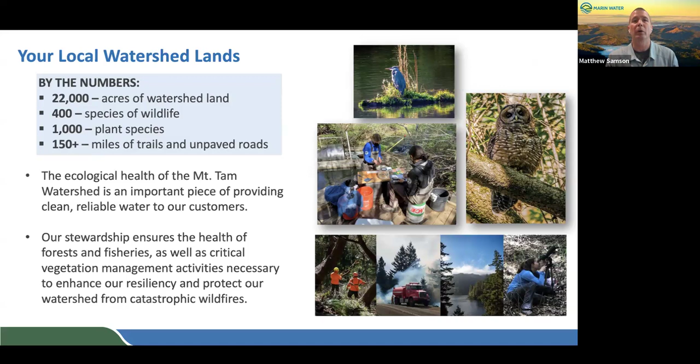It would have been a very environmentally negative impact to a lot of communities, and we really would have been not looked upon kindly in the court of public opinion, as we look to take advantage of what we would consider disenfranchised communities in the East Bay, just to make sure that we could get our water when we wanted it. So you can see the timeline, how it went.

We started a water supply assessment. This was in the year I was fortunate enough to be elected into. It wasn't part of the first component, but the high level evaluation of everything we could do went into this water supply assessment, meaning every option we could think of, whether it was recycled water, desalination, expansion of reservoirs, more water from the Russian River, or a variety of other small projects we could aggregate to try to get us to where we're at. And we had a little breathing room because we had the miracle rain in October of 2021 that filled our reservoirs up.

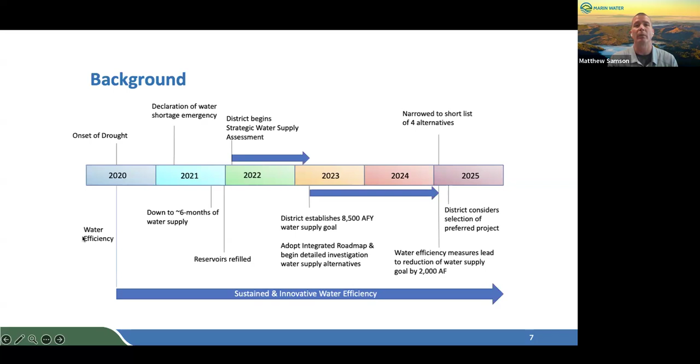So when we looked at our demand, and this is the little bit of the controversial part, what you see there is we had a baseline need of 8,500 acre feet, and that's what I was talking about with the supply assessment, or SWSA, as you see as an acronym.

When we start trending the water use by our customers coming out of this drought, the 2021 drought, we have not experienced a rebound that we've expected. Historically, as droughts happen, people's water use drops off considerably when we call out for conservation or reduction in water use. And then we try to throw a bunch of different measures at it, whether it's a low-flow toilet or removing your grass and replacing it with drought-tolerant plants, a variety of things. And so we don't ever see usually a return to a traditional demand, but we get somewhat close.

Well, this time we haven't gotten that close, and so we've been well below what we've had before. What I mean by that is prior to this drought, we were averaging about 27 million gallons of water a day, production-wise. And we're still down at 20 million, sometimes a little bit less right now, as an average throughout the year. So we don't see this big rebound.

So we've lowered our initial need down to 6,500 acre feet. That still gets us way higher, and I'll show you what that would mean in terms of, had we had this amount of water historically for the past 20 years, what that would have meant for 2021.

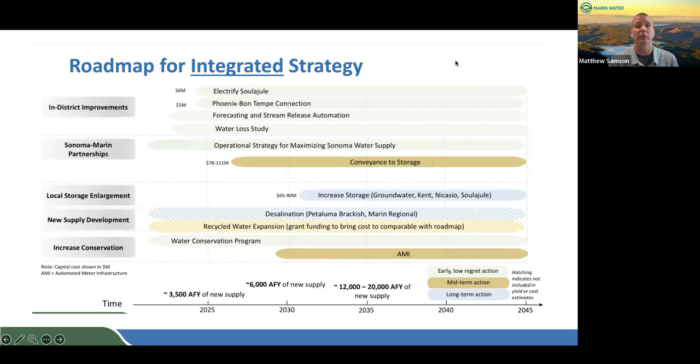So when we looked at the water supply assessment, going back, the assessment came back and said, all right folks, here's all the viable options we can look at. Starting on the left, the roadmap, we looked at 3 different general categories.

How can we potentially get more out of our partnership with Sonoma Water? How can we make our own buckets or reservoirs bigger? And then is there any way we can start making water in a cost-effective way that will provide a bunch of different benefits?

From those 3 categories, you can see we had quite a few alternatives in the conveyance partnership with Sonoma Marin. We looked at 11 different ways to increase our reservoirs, and then we looked at 9 new supply alternatives. Those numbers might seem a little high, but when you break it down, you'll see that something like a desalination plant has 3 alternatives based on water production capacity.

As we continued to whittle it down through evaluation, we got down to smaller numbers. You can see 13 to 3, 11 to 3, but the new supplies stayed the same. And then out of those 3 categories, we had the 4 recommendations you see all the way to the right.

The PETA 3 - PETA 3 is a Petaluma acronym for where the pipeline would come, or an enhanced pipeline at Sonoma. The local storage, we looked at just 2 reservoirs based on feasibility - that was Soulajule and Kent, both to raise - and we'll dive into those just a bit.

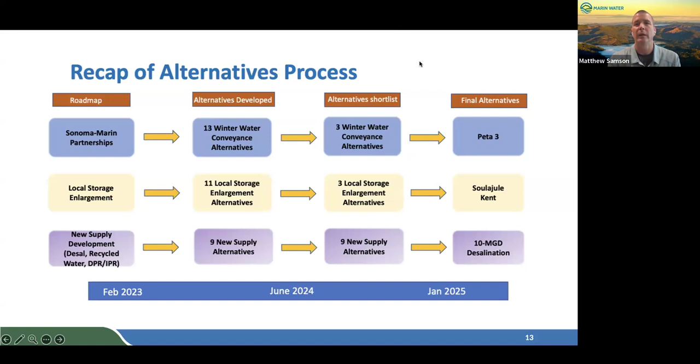And then the most cost-effective supply project landed on the 10 million gallon per day desalination plant. Going back to thinking about what I said, we're at 20 million gallons a day use right now, so that would actually provide half the day's use. But I'll go into some of the constraints that the desal project would have and why it's causing us a bit of a challenge.

Looking at all the options, we start with a whole bunch of things, but basics is how much water can we get, how much does it cost, and then we use average acre foot cost for these productions, and they're based on categories.

The first one is a conservation category. What you see is AMI, or automated meter infrastructure. It's basically a smart meter for your home water system that gives each homeowner a better idea of how they're using their water. Right now, one of the challenges we have is everyone in the district gets a bill every 2 months, so you have no idea where your water spikes and where they weren't, what you use water on, et cetera, or more importantly, if you had a leak or not.

And so this will be able to detect leaks and things like that. I don't think it's a panacea, I don't think it's a silver bullet, but I do think it's a logical component of a modern water system.

Below that, you see recycled water in purple through a variety of different options. There's some specific projects like San Quentin Prison or Peacock Gap Golf Course. And then you see different kinds, direct potable reuse or indirect potable reuse, just different technologies on how water is recycled. Direct potable means it's actually coming right out of the factory or plant going into a pipe in the system with potable water already.

Indirect is it's treated just a little bit below, then that water is placed into the reservoirs, then the water goes through the regular treatment plant and gets there. The desalinization of a variety of capacities, below that the local storage enhancements, and then the bottom one is the conveyance piece.

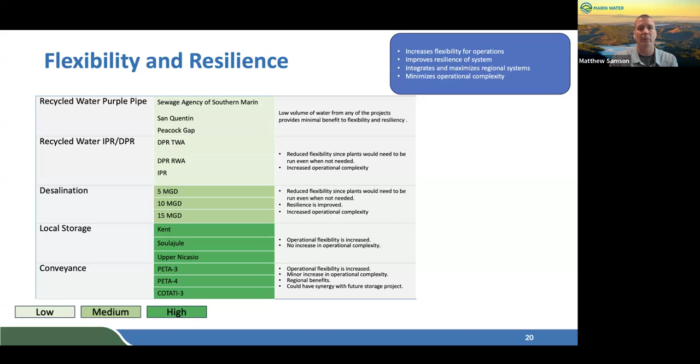And schedule implementation is a big one for us too, because again, we don't have time. We experienced severe drought in the late 70s. We did it again in the early 90s. We did it again in the teens. We did it again in early 2020, 2021. And that number, or that distance, or the variable between droughts is not increasing, it's decreasing.

So we need to be ready for the next one right away, or at least be able to do it. So when we don't have something that's going to be easily implementable, I don't think it's responsible to start with that as the main focus until we can get some breathing room, build some projects in. And that's the tack we're taking on this right now.

You look at these timelines, I mean, look at local storage, and I keep going back to that because I think it's a priority, or it should be a priority, but at least 10 years to have an impact. Now, late 70s drought, 78, 79, the planning started 79, really try to get up. These projects were actually put into place within 5 years. But it's a different landscape back then that we're dealing with now. And the red tape is considerably more, the regulations much more, and the public engagement much more. And so we have to be very respectful of all of those when we're looking at estimating timelines.

And you look at the bottom one, conveyance, which we ultimately landed on as a number one priority to move forward with. These can all be put into place pretty quickly, and that's a very important component of the thought process, what we're dealing with.

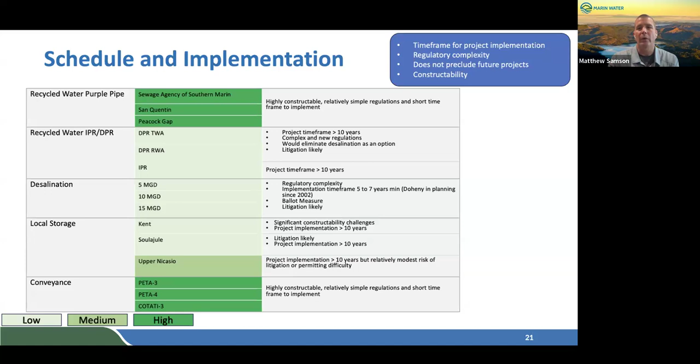Water quality, we would never be able to do anything in Marin if we jeopardize the quality of the water we're giving, and the bottom two projects would maintain that. Purple pipe scores high because it's not going to be used for potable water, so we don't consider it as an impact.

But recycled water and desalinization are different than what we get off the watershed. Are they still healthy and absolutely safe to drink? Absolutely. Will they taste different than what you're dealing with now? Absolutely. And so that's what we want to do.

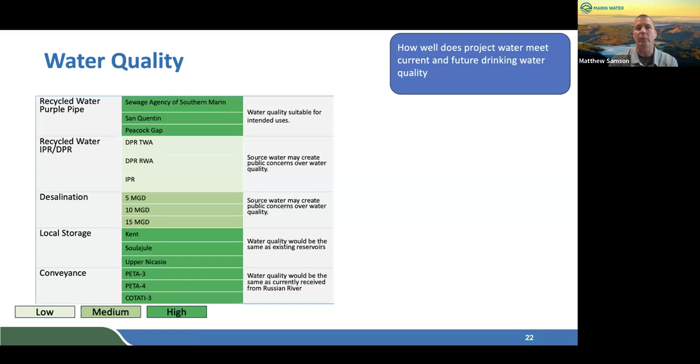We're also really concerned when we get into the social good of it. If only some communities in Marin are receiving recycled or desalinated water, is that really fair to everybody in the district? It's more of a rhetorical question, but something to consider.

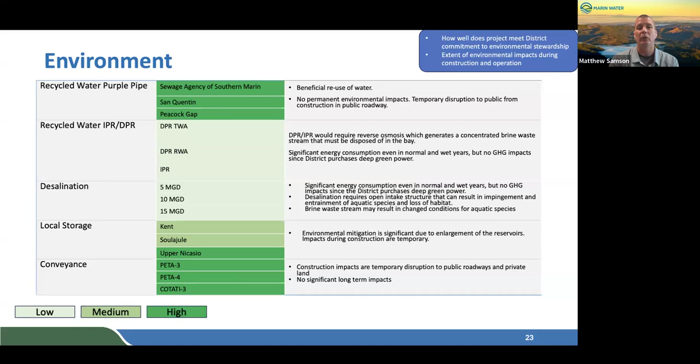The environmental component is going to be big for us because we need to maintain our lands in a way they're productive and protective of all the benefits we have right now, meaning all the different ecosystems, ecology, animals and plants we're able to enjoy in the watershed. We don't want to mess those up. Looking at these all the way down, conveyance again continues to score high, much like it did on the big chart.

Social stewardship is where we get into the inequity of which water goes where, and also taking lands for public good and how that falls in the court of public opinion. But again, you look at the bottom, conveyance continues to score high because a pipeline through open fields is not going to have the same impact as raising a dam and flooding someone's home. So important to consider.

And then probably the biggest driver for a lot of this is the bang for the buck. How much are we going to be paying for these? And if so, what does that do to rates? And is it really worth it?

You look at some of this stuff, even recycled water is very, very expensive. Do we want to look at, under Peacock Gap, a $28.5 million investment of public funds to supply recycled water to a golf course that would reduce their demand on the potable water system? Again, court of public opinion, but there's some varying - it's hard to defend that investment without some sort of partnerships.

Desalinization is incredibly expensive. Recycled water right now is incredibly expensive to operate at cost per acre foot. And we are going to be greatly increasing our demand for electricity. We currently are Marin Clean Energy's most expensive customer, and we would only increase that with these because the draw for both desalinization and recycled water is incredibly high. It takes a lot of energy to force water through these membranes that help treat it and remove anything that shouldn't be in there.

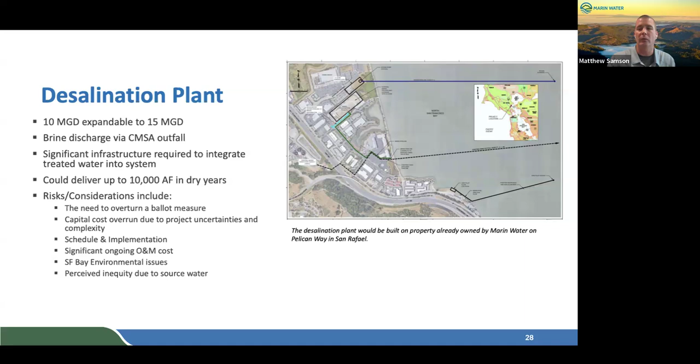Having that reservoir out, we say 1 to 3 years, but in construction and government projects it's really hard to meet that. If we come into a drought period without half our water, we'd be in a really, really bad place. That reservoir is substantial — it's huge, and we can make it bigger. I think we should, and I want to continue it, but I'll show you where I think we should be going with that. There's going to be an environmental component. Anytime you take habitat on the watershed, we get sued, which is okay — it's a good check and balance — but we'd have to mitigate that somehow. This project is estimated between $500 and $600 million, on top of not having water available for a few years.

What's interesting too is this reservoir is what really maintains Lagunitas Creek's fish habitat. Without it, it would just be a seasonal flow through there — not as good of quality. So during the 3 or 4 year process, we'd actually have to build a pipeline from Alpine Lake, the next upstream reservoir, all the way through the dry bed of Kent to continue pushing water down Lagunitas Creek. It's quite a lift to be able to do that, and those requirements aren't self-imposed — it's a state requirement as part of our water rights when we capture and store water.

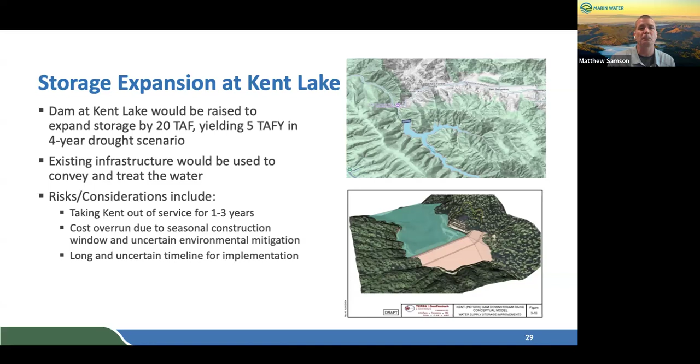If we do raise this, or want to raise this, it's going to come with significant legal challenge and significant costs that could escalate to the point where it becomes economically irresponsible, depending on how much money would be awarded to the folks living there. We're very aware this is someone's livelihood. These are families that have lived there for hundreds of years, and we don't take this kind of decision lightly.

We really want to understand the impacts not only to families, but what it would mean to district customers. We got some pushback from the public saying, why is a couple families able to hold us hostage? I don't necessarily agree with that framing, because we need to make sure the good for everybody is the priority. Does it make sense to pay twice as much as what we should have paid for the same result just to move this forward? That's taking into consideration the economics and the rates for everybody in our district.

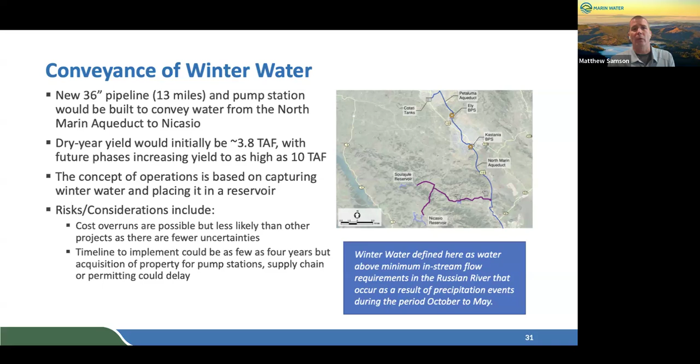So there's been some concern from the public, saying, well, hey, you're just tying into a different watershed. The Russian River—what happens if they experience a drought?

We would take more because we're now physically able to do that and top off our reservoirs. Now, could they potentially spill from a storm? Yeah, absolutely. But this is a bit of an insurance policy that's not going to be crushing for rate affordability.

And we can now constantly have topped off reservoirs for a while, until we really look to build our own big reservoir. The reason I say build our own big reservoir is because, once you get that project, it's still cheaper than buying water. Mother Nature's giving it to us—we just don't have a place to put it. So once we get a place to put it, it makes a lot more sense to do it that way. But this pipeline is going to be an integral part of all of that.

But it's important to understand we didn't want to move forward with a project that would be constrained like everything else based on drought, but it's not here. The Russian River water flows—we spent a lot of time evaluating historically where the Russian River's been and what their requirements are to discharge water, to make sure we still stayed under that for them.

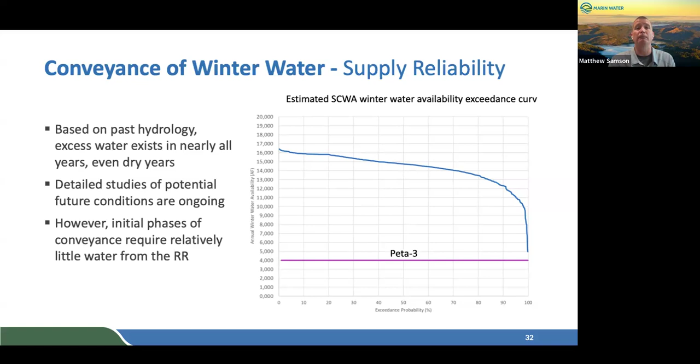So this is where we're at right now. We have these projects moving, everything's continuing to move. But we just took a turn on the conveyance piece, right to design, construction, and operate. And we're still moving forward on those.

So conservation's an ongoing effort. In-district improvements—we're going to get there with some of these, but again, we got pretty handicapped with some of the pushback, both from our outside or exterior partners or some potential legal lawsuits. We're really doing well optimizing our operations; a lot of those in-system improvements have gone up quite a bit. We've got the conveyance piece moving, and then the last one, which is really neat, is the spillway piece that we'll get into.

Most importantly, regulations, because this is still a novel topic for the state of California in terms of widespread distribution. So we're engaging constantly. We're looking currently to schedule some recycled water workshops with the wastewater folks to see where we're at, dust off some of the studies, continually looking to areas we can even implement a pilot. And some of the other electeds outside of the water district itself have started to engage the state to see where funding could potentially be coming up.

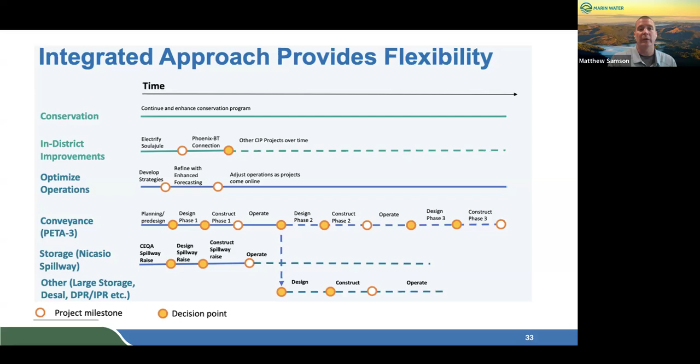And where this is interesting is, I'll show you in a graph in a second about how this would have protected us from the last one. And here's your second later.

There's a chunk of the reservoirs that's not usable water, so we can't even count on that. And so that's when everybody got really amped up to move to the pipeline, and rightfully so, because had we not had that rain, that would have been an issue.

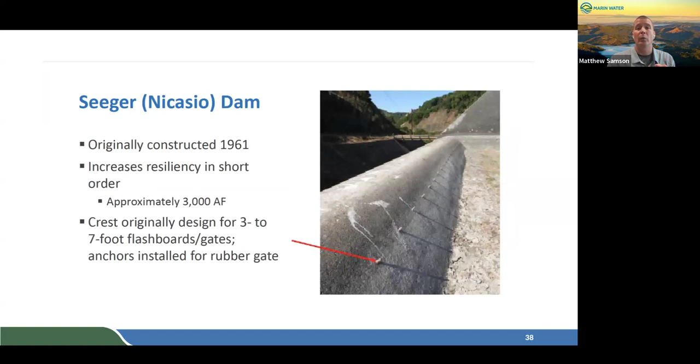Now, there's still a lot of regulations, still a lot of things. We've moved forward quickly, and we anticipate this project to break ground within the year, raising this dam to get us almost 3,000 acre feet — actually expecting 4,000 acre feet — in a timeframe of 2 or 3 years.

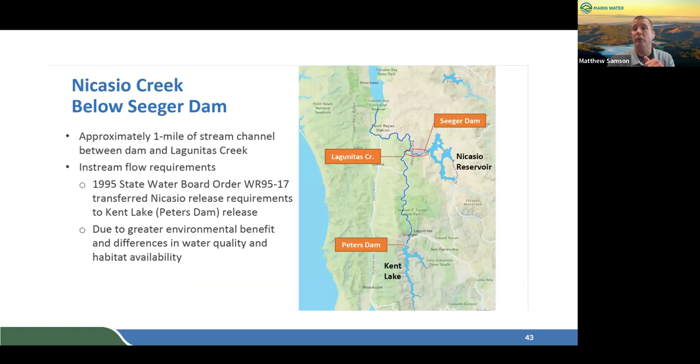These were just some slides I wanted to share to let everyone know we've made sure to engage everybody we need to. You can see where the actual dam is, and that's the Nicasio Creek that meets up with Lagunitas Creek. So there's a concern about the population there.

So we're moving forward on that. We've already approved funding. We're moving forward with all efforts on this one in the pipeline.

So with that, I did want to talk, Francesca, real quickly about the AB 38 inspections. I know there's a lot for the group from that. I'm going to take this hat off and put the other one on real quick.

Thank you. So there's concern about the fire hazard severity zone maps that came out recently from the state. Marin's dropped on the 24th of February, and what that means to the real estate market.

SRA, state responsibility area, LRA, local responsibility area. Most of the areas we're talking about in Marin in terms of the built environment are local responsibility areas. So when these came out, you can see what the requirements are. Moderate and high have been left off the prior local responsibility area maps — this is the first iteration that includes them — but very high has been included for a while.

So for the real estate component, there's a hazard disclosure and then the AB 38 approval to be able to inspect, confirming the property meets the defensible space standards based on the local fire department.

Right now, the process is very early, meaning the maps dropped on the 24th of February. The fire agency having jurisdiction or authority has to make the maps public to their constituents or community within 30 days, and then has to adopt the maps within 120 days from that period. That adoption includes recording with the county and recording with the state.

So you are not going to see any change to the current requirements until the agency has moved quickly and gotten them adopted by ordinance. It usually takes 2 readings from an elected body. Then they get uploaded or recorded, and that's where you'll see the new requirements hit.

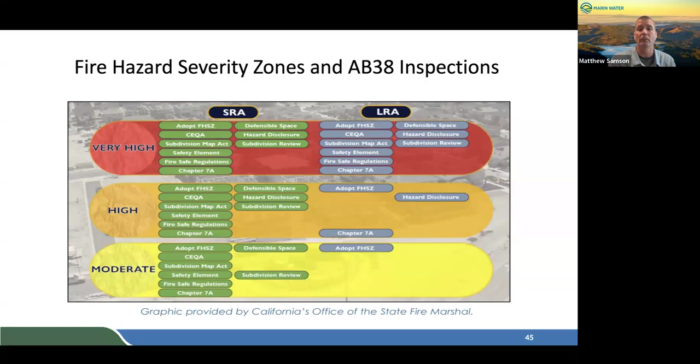I will see if we have — I don't think we do have any questions. I have one or two questions, but I think what I'm going to do is say goodbye to everybody, because I know there are people still hanging in there and want to go home. So let me just find where I am. I'm sure it's not going home — I'm very sure it's going back to work.